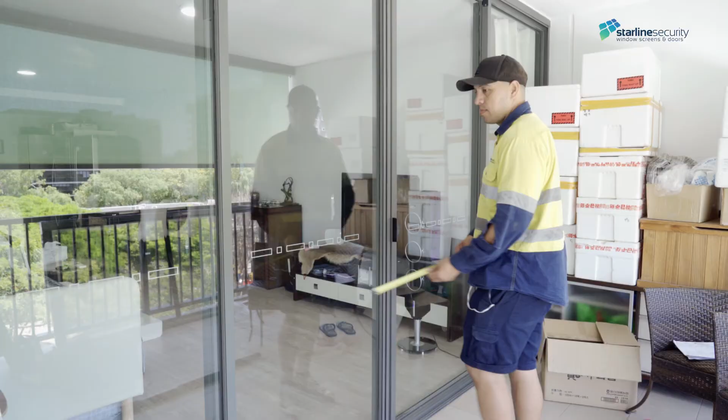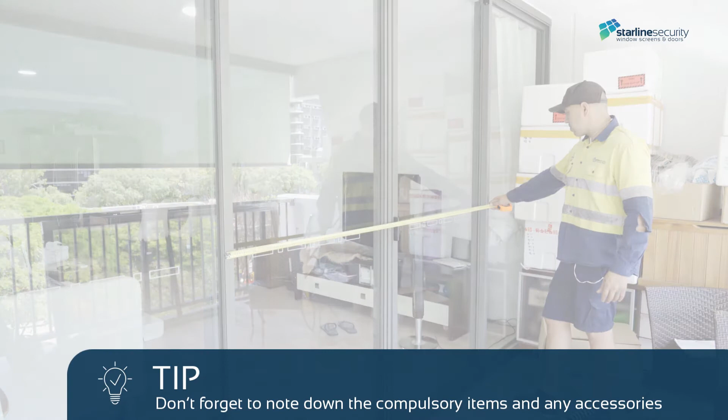When check measuring for an insect OXXO door, don't forget to note down the compulsory items and any accessories you'll need to complete the job. These can include interlocks, bug strips, H receivers, and sometimes top and bottom tracks. For this job, we're installing two F interlocks, an H receiver, and two 25mm bug strips, one for each sliding door.

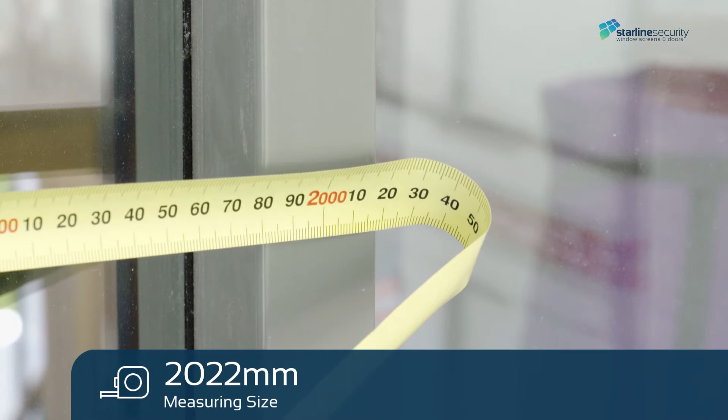Measure the width of both doors from interlock to interlock, which gives us 2022mm. Deduct 4mm to compensate for the lock striker plate and the H receiver. Then divide by 2 and deduct 1mm to get a manufacture size of 1008mm.

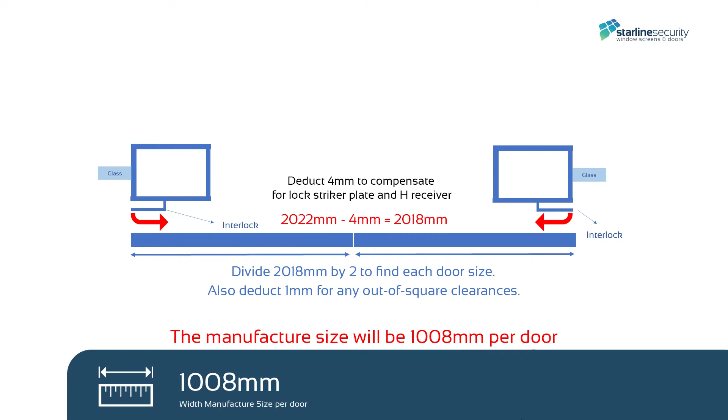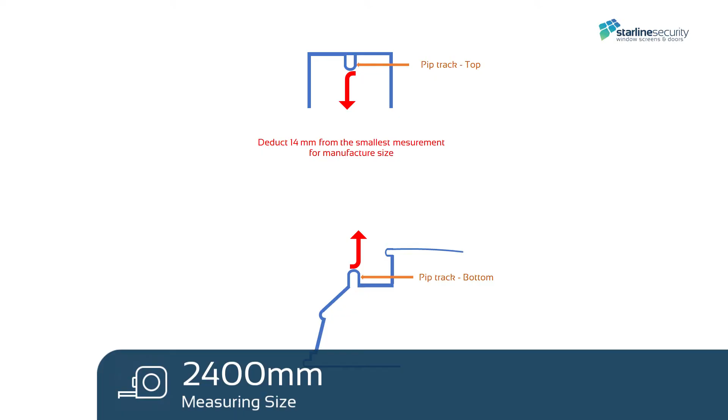Measure the height from the top pip track to the bottom pip track. Measure the left, middle and right sides. This door is reasonably straight, with 2400mm as the opening size. Deducting 14mm for top and bottom wheels gives a manufactured size of 2386mm.

Measuring the lock height: measure from the bottom channel to the top of the glass door handle, add around 40mm.

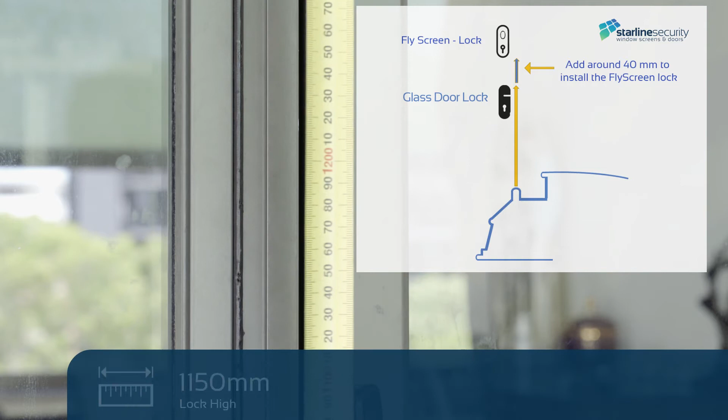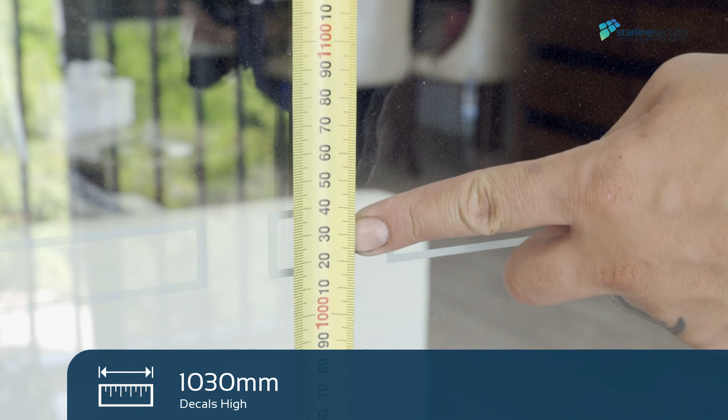Installing the door: attach top guides to the door for a smooth sliding. Lift the door into place, making sure the lock and receiver are in the correct position. Square the doors with each other and the glass door set. Align both doors with the glass door back interlocks while checking to see both doors are aligned where they meet.

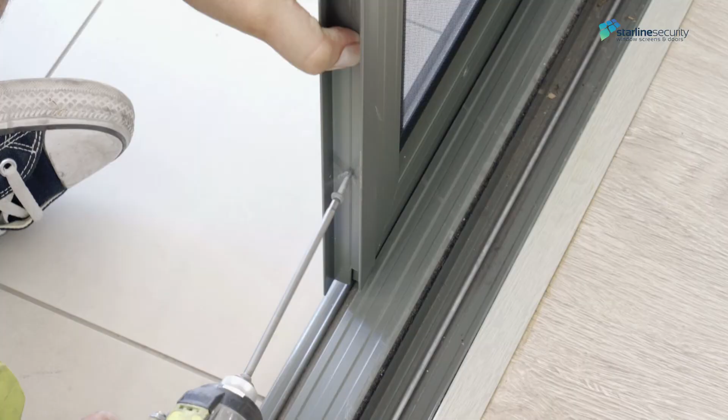Once the doors are square, measure the H receiver, in this case 2380mm, and deduct 4mm for the cut size. Note that this is a custom cut because the H receiver is close to the bottom sill. Then fix your H receiver with panhead screws.

Installing the lock by installing the cylinder first. Face the cylinder tongue towards the jamb. Turn the key, then insert and tighten with the cylinder screw provided.

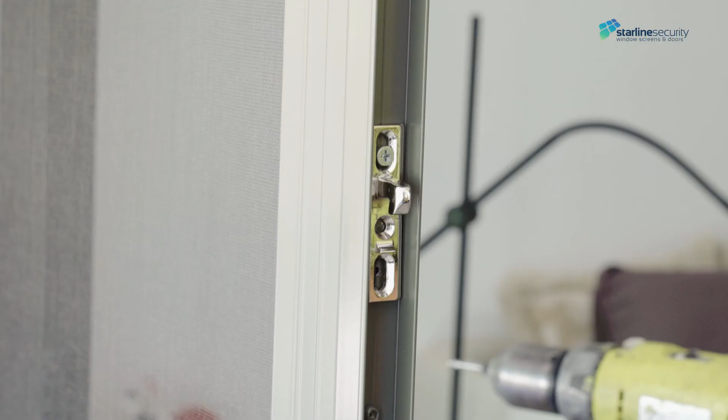Carefully install the lock handle faceplates, holding the door firmly to avoid slipping the drill bit and damaging the fly screen mesh. Engage the striker in the lock, peel the tape and close the door. Reopen the door, check the striker position and fix off with countersunk screws.

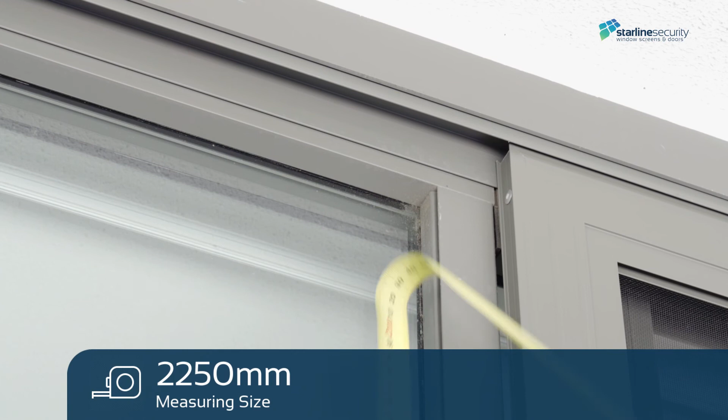Measure and cut the interlocks and fix them to the back edge of the doors. Measure from the bottom of the fixed glass door side sill to the top of the glass, then deduct 10mm for the cut size of your F interlocks. Fix the F interlocks with security screws on both sliding doors.

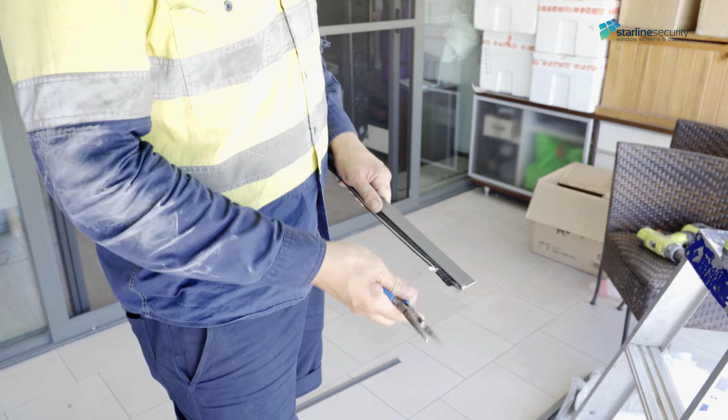Install the bug strip. Close the doors and measure from the interlock to the receiver. Thread the pile into the bug strip, remove the tape and crimp off the ends. Install the bug strip with the doors closed to make sure both strips are close together in the center.

There you go, you've learned how to measure and install an OXXO insect screen sliding door.